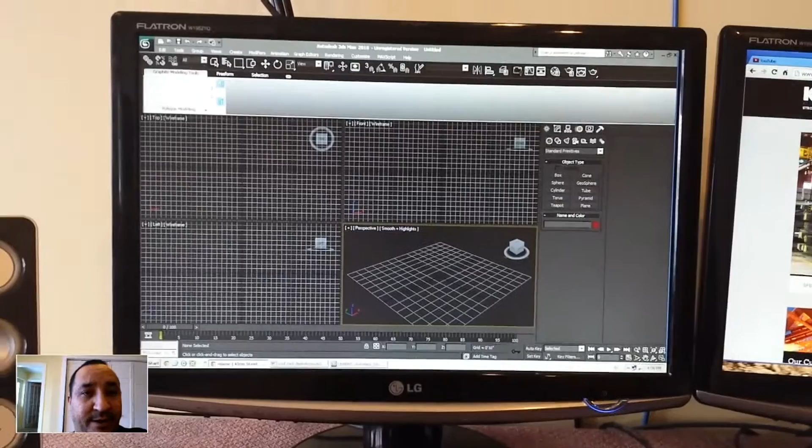Here's the program I'm using. Sorry about the shakiness, I'm holding it with my hand while trying to show you guys this. It's a program called 3ds Max, a real good program. This is the 2010 version.

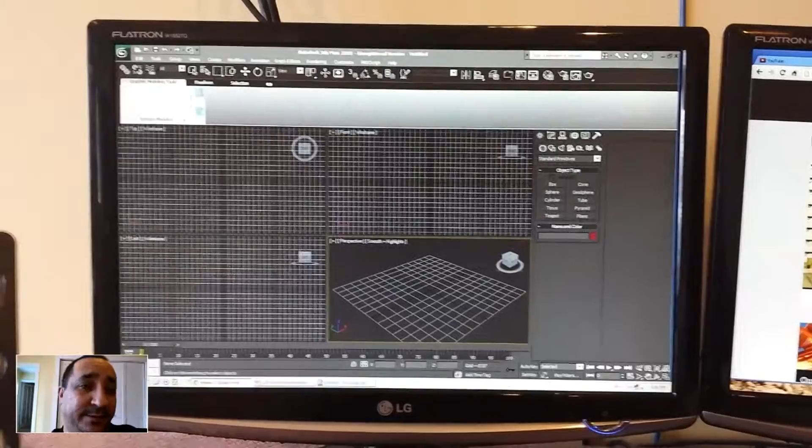I'm not going to begin to show you guys how to use this program. I'm not an expert at it by any stretch of the imagination. I can get some basic stuff done, and that's pretty much it. Some people may not think it's basic, but it definitely is compared to what this program is capable of doing. I stumble my way around through it, but this is the program I use whenever I feel the need to draw something up in 3D so I can get a really good idea of the way it's going to look.

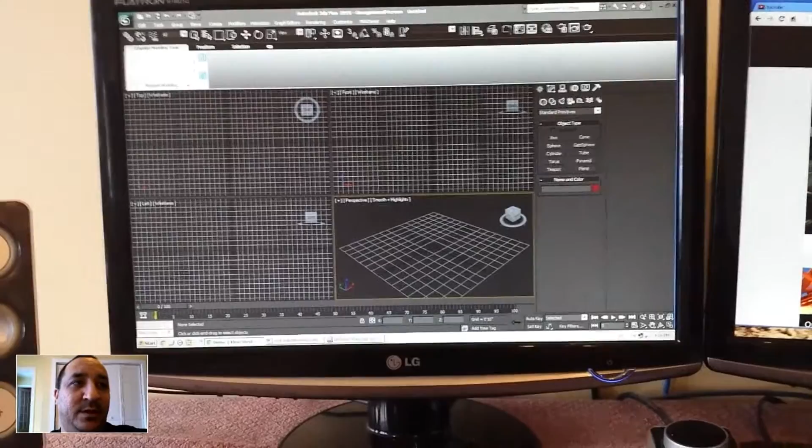With this roof rack, since this is the second one I've done for my truck, I decided to draw this one up so I could really look at it and decide if I like the design or not. So I'm going to be spending a lot of hours in front of this program drawing this up. I'm not going to show you the process, since it's too long, but I'll show you when it's done.

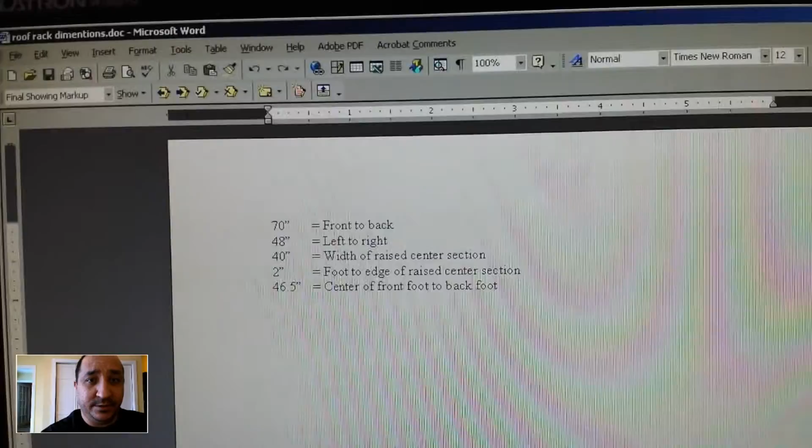Let me come over here to my dimensions. You don't really need to pay attention to any of the dimensions other than the top two. Front to back, 70 inches total. Left to right, 48 inches. The other measurements are stuff you don't have to be concerned with - I do, but you don't.

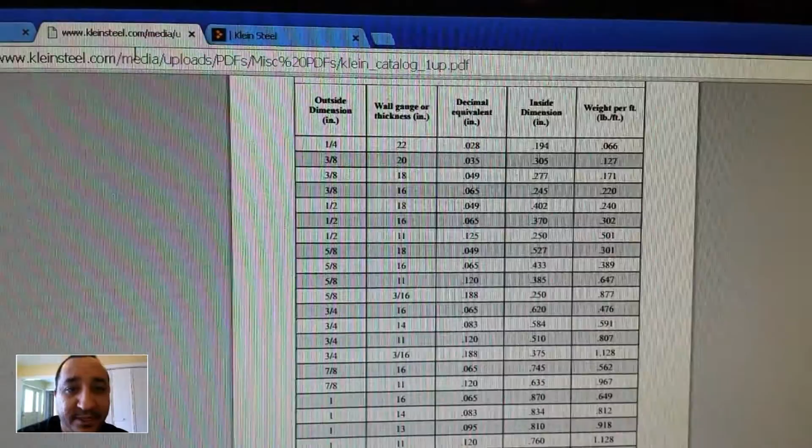Anyway, here's their catalog, I've already got it pulled up to where I need to be. So this is round tubing. Basically what we're looking at is I was trying to decide between 1 inch or 7/8 of an inch. I kind of wanted to go thinner than 16 gauge, but I don't think that's an option anywhere, and that's the thinnest gauge that they have.

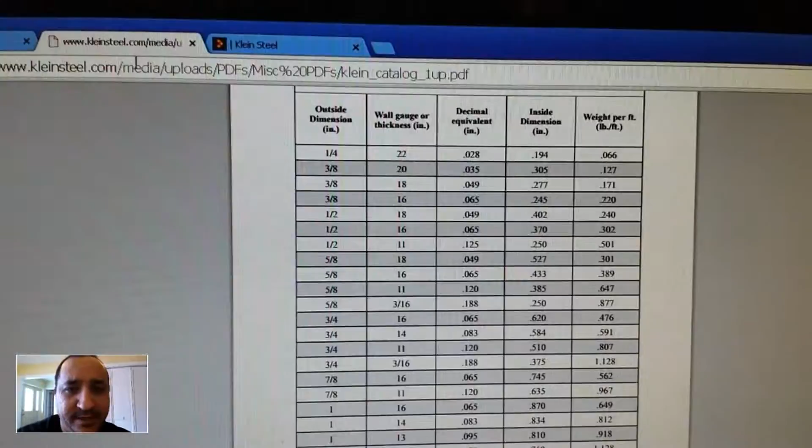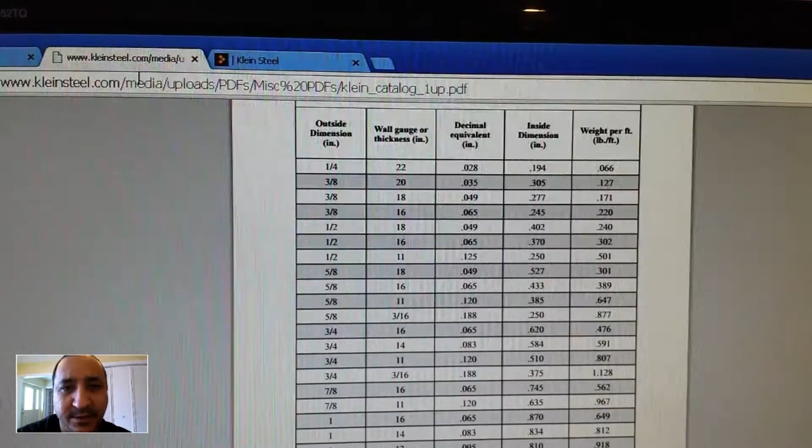So I'm going to go out to the shop right now to take a look at the bender I'm going to use to bend this tubing. I know I have a 1 inch die set, I'm not sure if I have a 7/8 die set, so I'm going to check that out. If I do, I'm probably going to go with 7/8 just because it'll be cheaper, lighter, and should be more than sufficient.

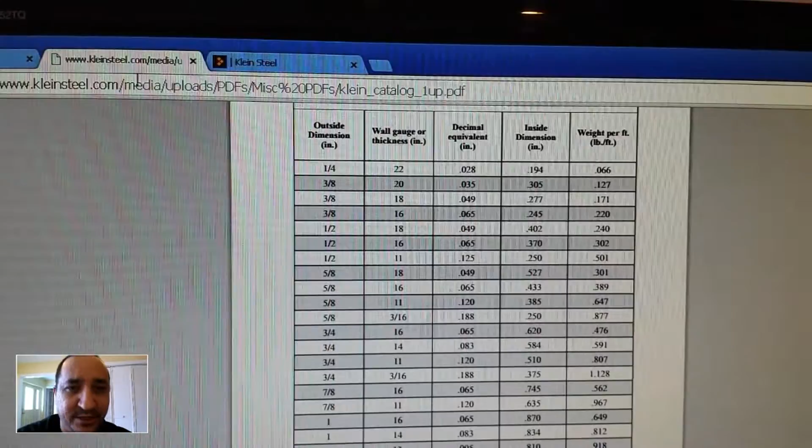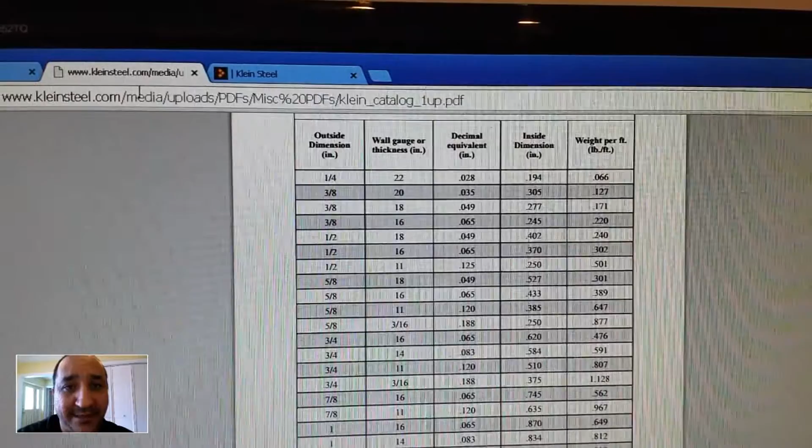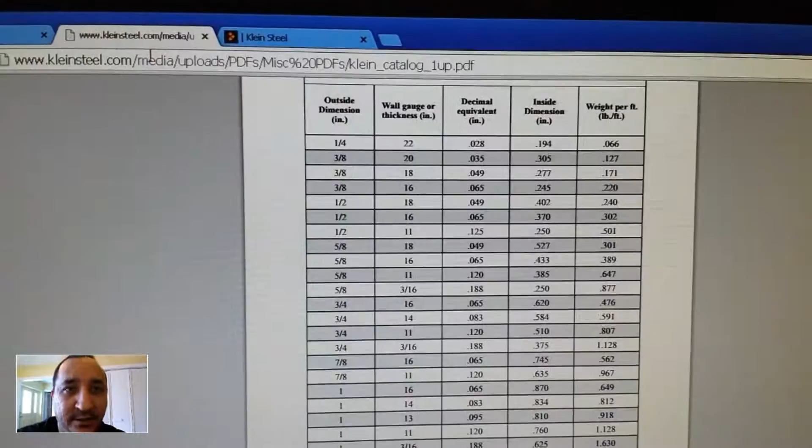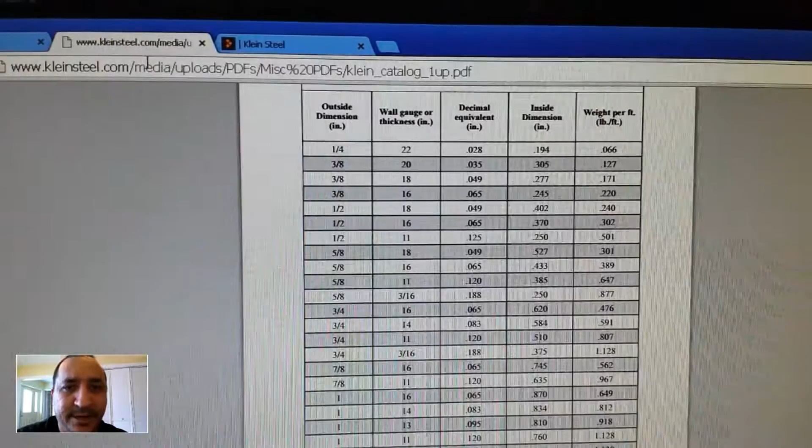The roof rack that I originally had on there was 3/4 inch square, 16 gauge, and it was plenty fine. This is not going to be a very tall roof rack - it's going to be a total of 4 inches from the bottom of the frame to the top, so the actual basket that stuff sits inside will be even shallower. I wanted to make it shallow because the original roof rack was taller than 4 inches, especially towards the front since I had lights in it, and I definitely felt the difference on the interstate as far as drag's concerned. So I decided to keep this a little low profile since I'm going to be putting an LED bar on the front of it.

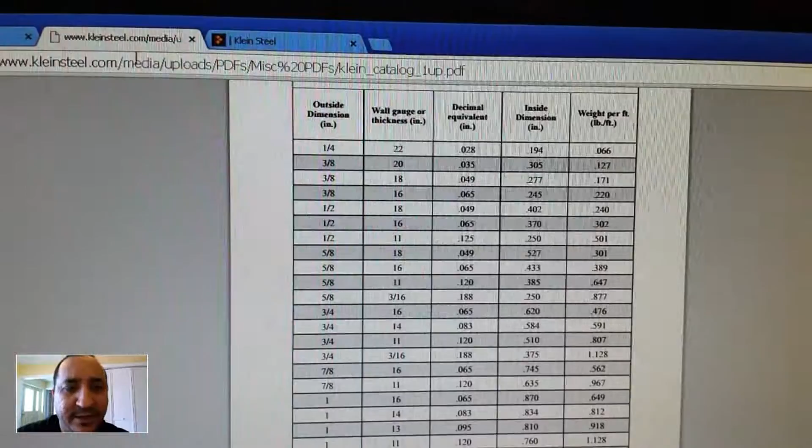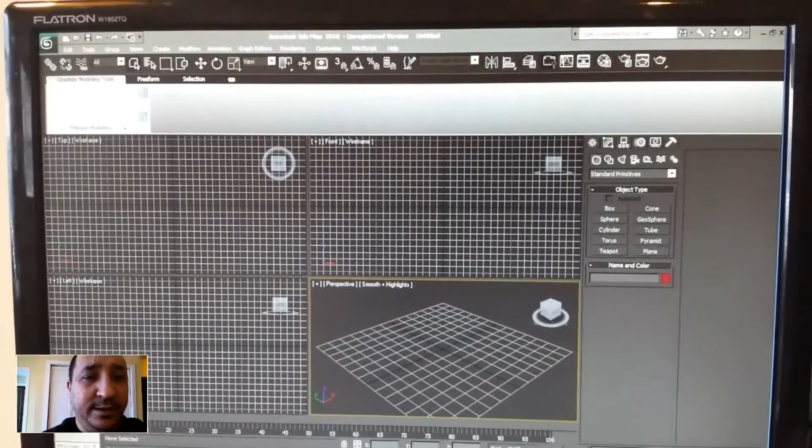So anyway, I'm going to head out to the shop, find out which die sets I have, what size of tubing I'm going to use, and then come back. I'm going to spend a lot of hours in this, and I'm not going to show you guys the entire process because it's a long drawn out thing, hours and hours. I'll show you when it's done, give you a 3D view, and pull this program back up so you can see what I'm working with. Sit tight, I'll be right back.

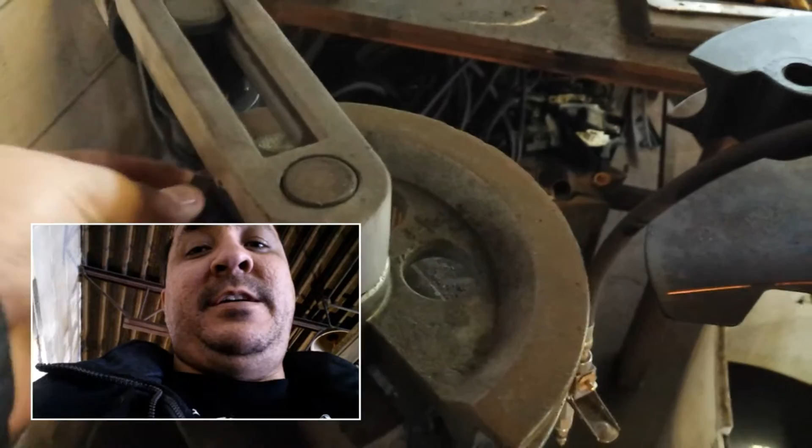Okay, so here's what we're going to use to bend that tubing. This is a bender made by Woodward Fab. It's not the greatest thing in the world. I've only used it so far for square tubing, so this will be the first time I've actually used it for round tube.

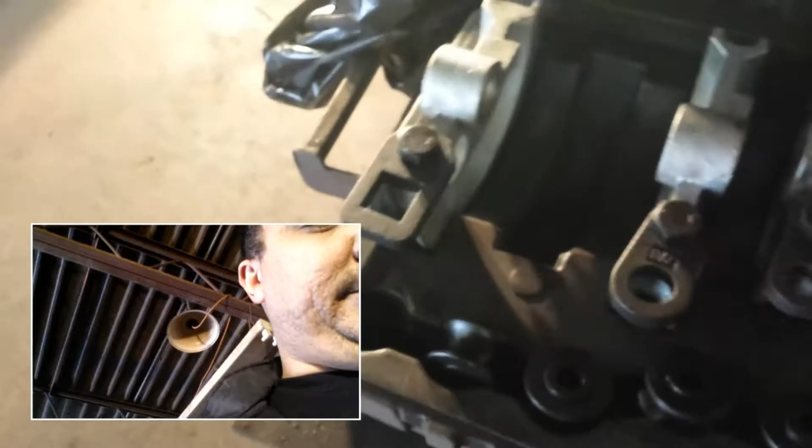Anyway, the square die is on here. I'm going to open up the case and figure out what die sets I have for the round tubing. Here's the case that it comes in, and here's all the different die sets you get. So I do have a 7/8 round tube die - that's actually the biggest round tube I have.

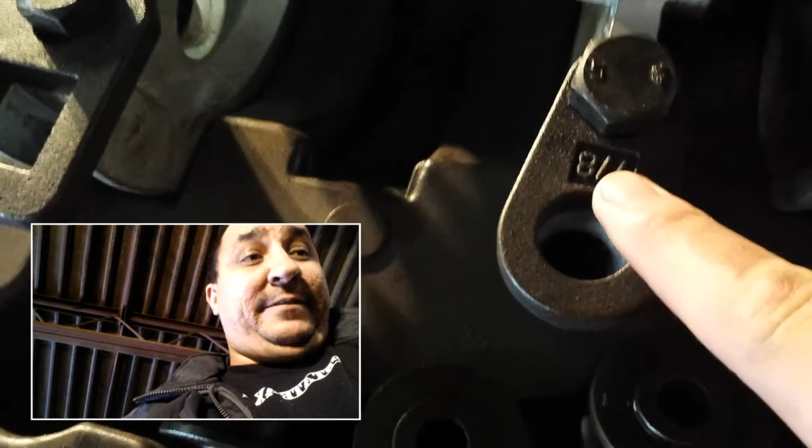So it's a good thing I checked this before I decided to run with a 1-inch die set, because I don't have a 1-inch tube. I'm not talking about my tube, I'm talking about the tube for the roof rack. Anyway, so we're going to run with 7/8.

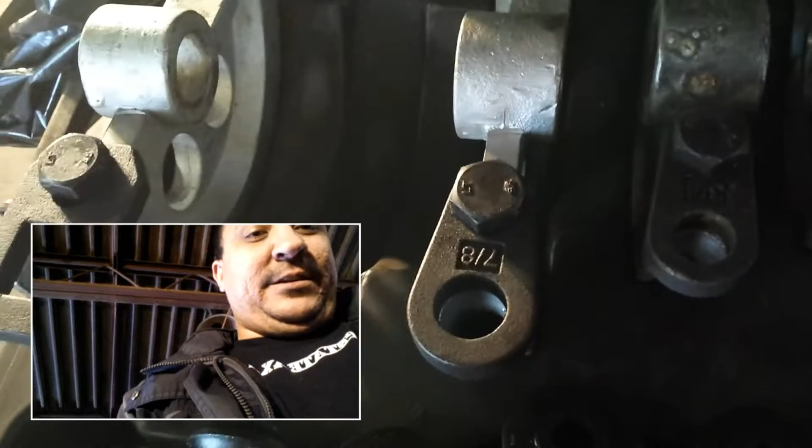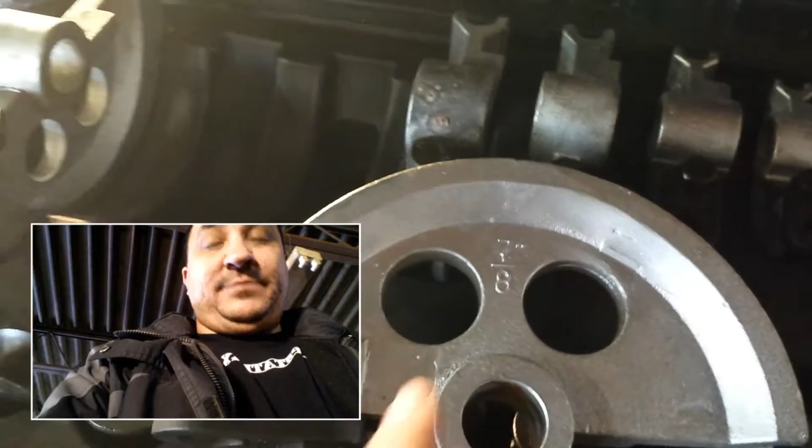That's good to know. I do need to check something really quick - I need to figure out what the radius is on this bend, so I can figure out how many inches it is from here to here, center line. Let me grab my measuring tape real quick, and I will discuss with you the mathematical equation you need to know to figure that out.

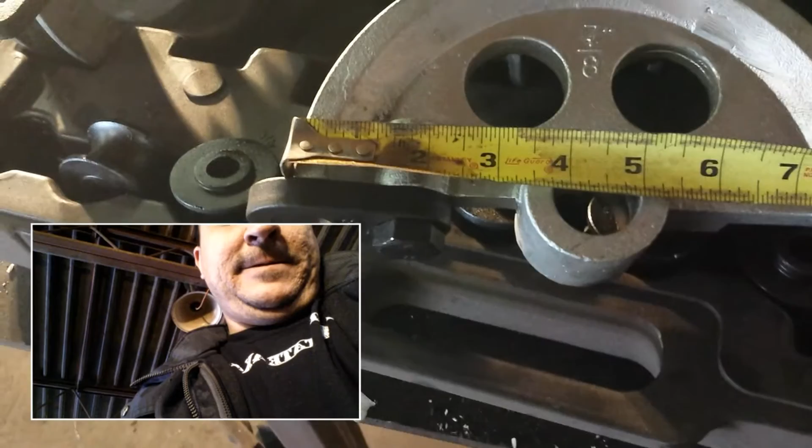But the center line radius on this die set is - we're just going to go ahead and say that's 4 3/8. Yeah, we're going to say that's 4 3/8. That's within a 1/16 of an inch, so that should be fine. So 4 3/8. I'm going to head back inside because it's cold as hell in my shop.

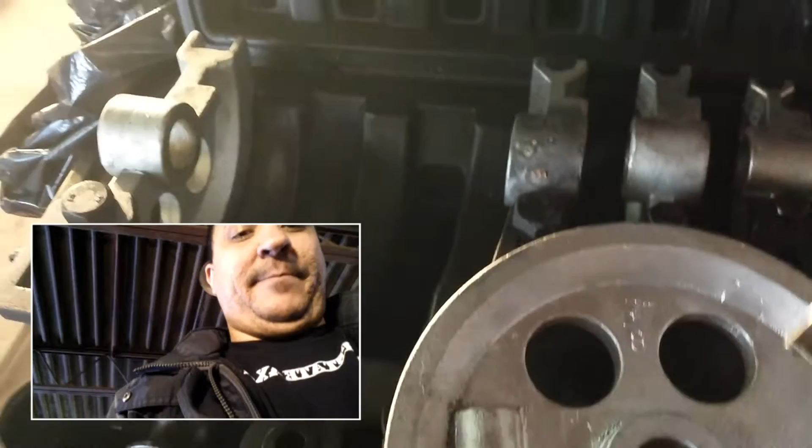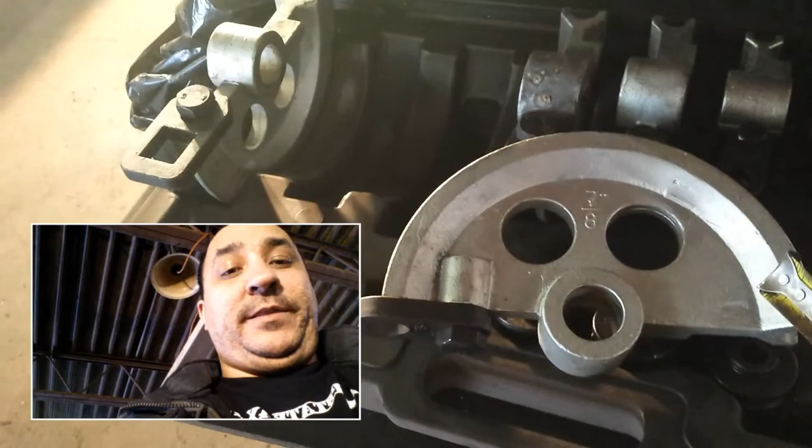I'll show you what the mathematical equation is to figure out what this distance is from here to here. I'm going to need to know that when I bend the tube, and also when I'm drawing this up in the program. I've actually started drawing it, but I needed to run out here because I was getting the corners designed up, so I needed to figure out what that was. I'll be right back, show you guys that in a second.

Hello everyone, back inside the house. We figured out that our center line radius is 4 3/8 of an inch. Now a center line radius means not the inside edge of the tube, not the outside edge of the tube, but from the center of the tube to the center of the bend. Radius is from the center of the circle to the outside edge.

For us to figure out what we need to do, we need to convert that 4 3/8 inch to a decimal point. The 3/8 needs to be converted so we can figure this out mathematically on the calculator. How you convert that fraction to a decimal is pretty simple: top number divided by the bottom number. So in this case, 3 divided by 8 gives us our decimal point - 0.375. So our center line radius for that die set is 4.375 inches.

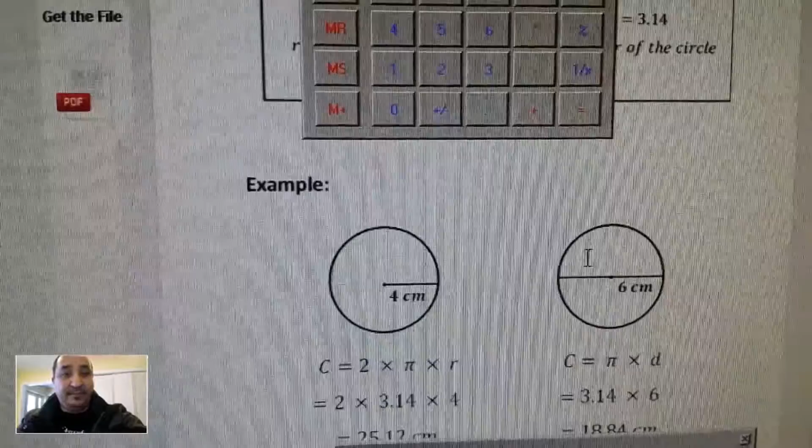Now what we need to do to figure out our circumference is double that so we can get our diameter, which is all the way across the circle. Then we're going to times that by pi, which is 3.14. That'll give us our circumference. Then we're going to have to divide that by 4, because a 90-degree bend is a quarter of the circumference - 90 degrees times 4 equals 360 degrees.

So I'm going to do this a little bit differently just because I can cut some of these steps in half. Essentially what I'm going to do is take this radius, times that by pi, and then divide it in half, and I should get the proper number. So, times 3.14 equals, divided by 2.

Okay, so here's what we got. And I know this is correct because I've done the math on this twice. I did it the long way by figuring out the diameter, then going to the circumference, then splitting it into 4. It's the same number.

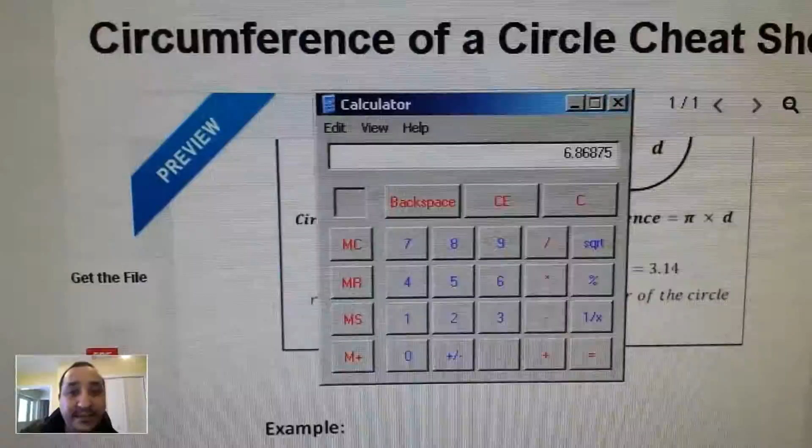So the length of the tube that is going to be required on that die set to make a 90-degree bend is 6 inches, or 6.87, and we're going to round this up to 7. 6.87 inches of tube to make a 90 degree bend.

Stop, let me rewind because I'm getting all tongue-tied. On that die set, we're going to need 6.87 inches of tubing to make the entire 90 degree bend on that particular die set.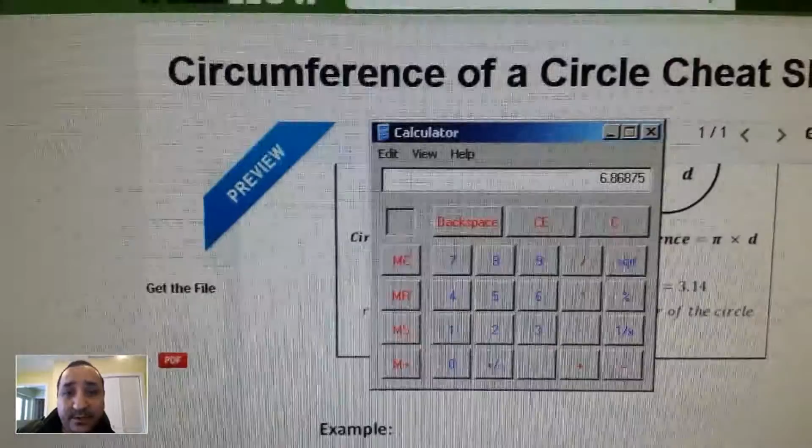So the reason why I needed that number is because over here in 3ds Max, you see that I have my bend here. This is my 90 degree bend. I have to make my bends separate when I'm drawing up this stuff. So I have my bend here, and I need to figure out what the length is.

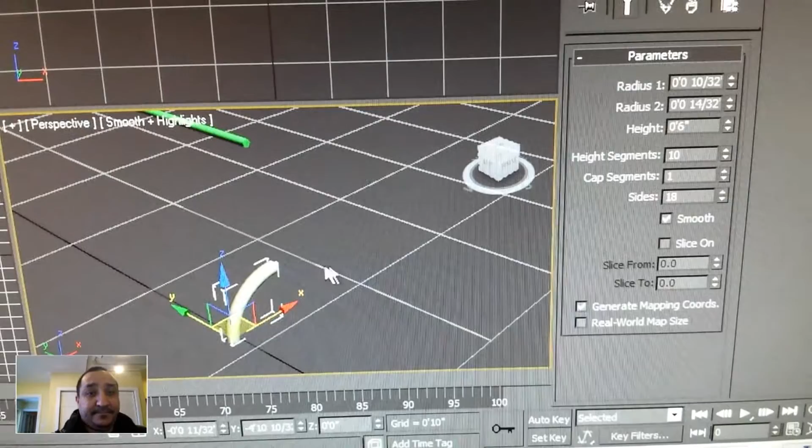So I'm going to click on my piece of tubing, and I already have it set up. I just kind of guessed. So I'm going to come over here to tube, and I'm going to go in here to the height. And my guess was really damn close if you look here.

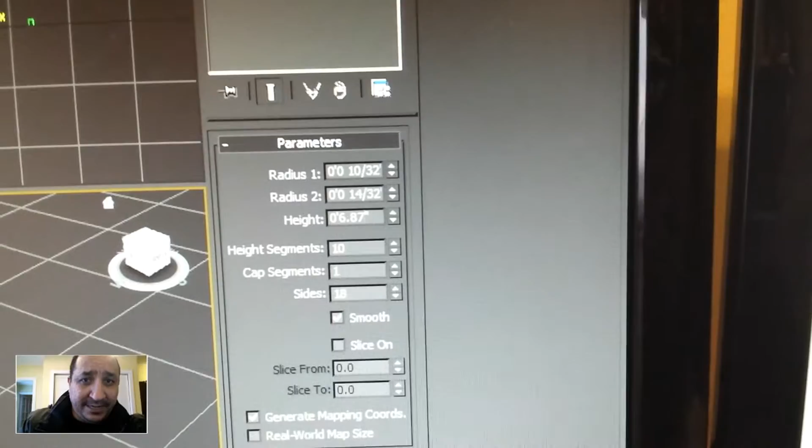It's 6 inches. So I'm just going to add the 0.87 to it, and even though the other dimensions are to the 32nd, this will convert it for me, so I don't have to worry about doing that math. If you want to figure out how to convert decimals back into fractions, go into Google and figure it out.

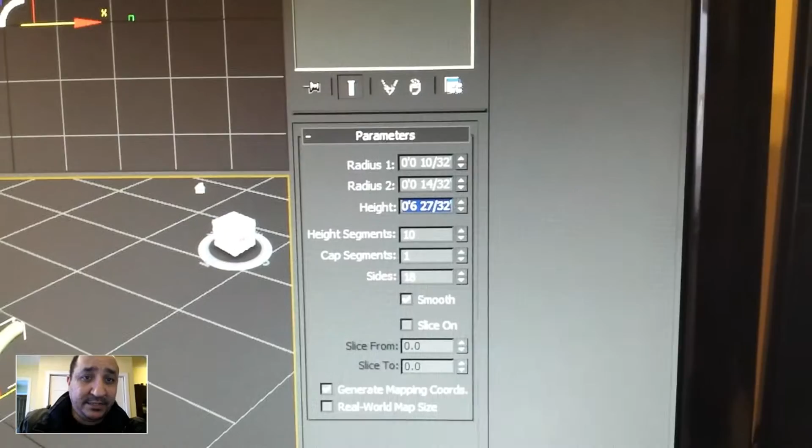When you're dealing with these programs though, 9 times out of 10 you're going to be converting over to decimals and so on and so forth. So I'm going to just hit enter, and it'll convert it into the 32nd. It's actually 27 over 32. So that's the length of tubing I'm going to need to make a 90 degree bend with that bender and that die set.

Okay, so I'll be back. I'm going to continue on with this drawing and we'll go from there. So see you in a second.

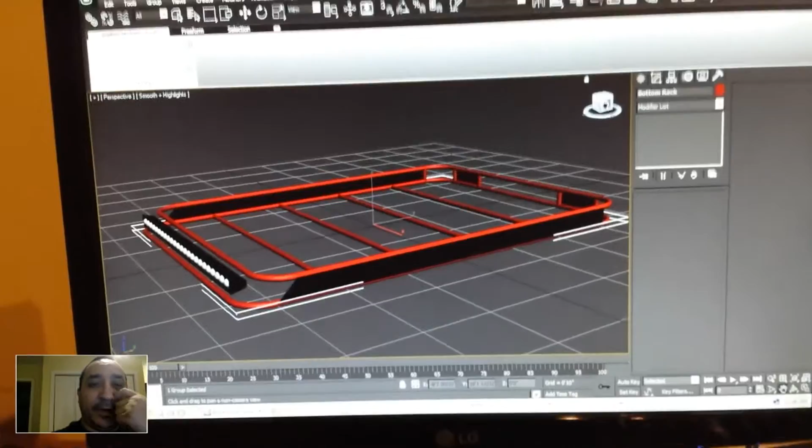Okay everybody, so here's what I got so far. It's not quite finished, obviously. There's no feet on it. If you look right here, there's nothing connecting the LED bar or the front of this rack.

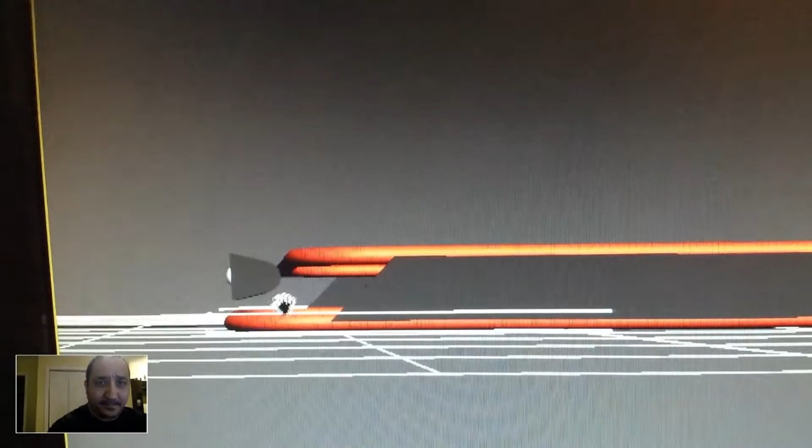What I'm thinking I'm going to do is do some 90 degree bends. It'll swoop down like that in a 90. What that'll allow me to do is have this pocket area here where I can attach to. Still going back and forth with that.

I could always just drop a diagonal brace in here, but I'm not sure that I want to do that. I think the 90s behind the light would be better, because then they would give me a surface to mount on.

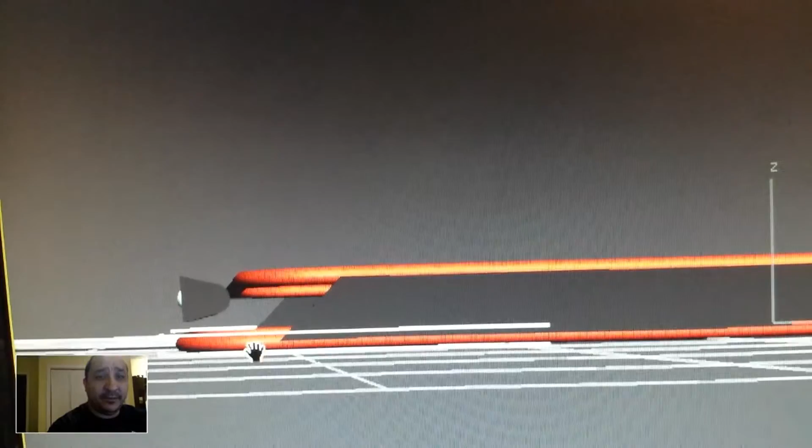Right now you see it being black and red. It looks kind of orange on my camera, but it's black and red. I seriously doubt it's going to be like that. It'll probably just be all black.

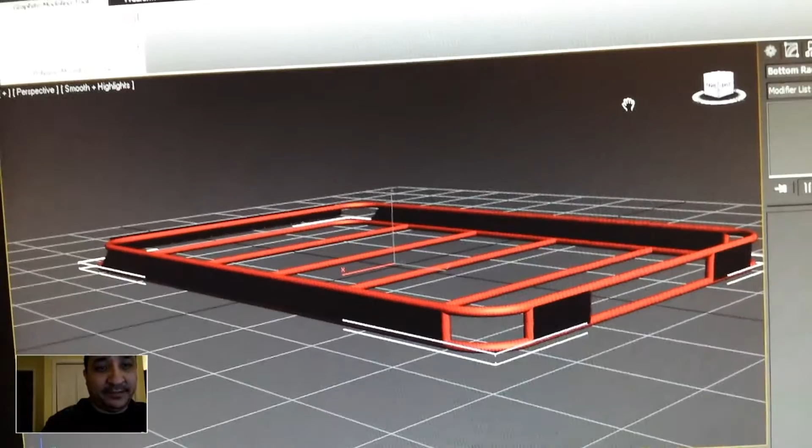The only way I could really do this would be like an unbelievable amount of painting, and it'd end up being sloppy, or I'd have to make the black panels removable. That's a possibility, but I don't know if I want to deal with that. I'm not even sure if I would like the black and red on my truck.

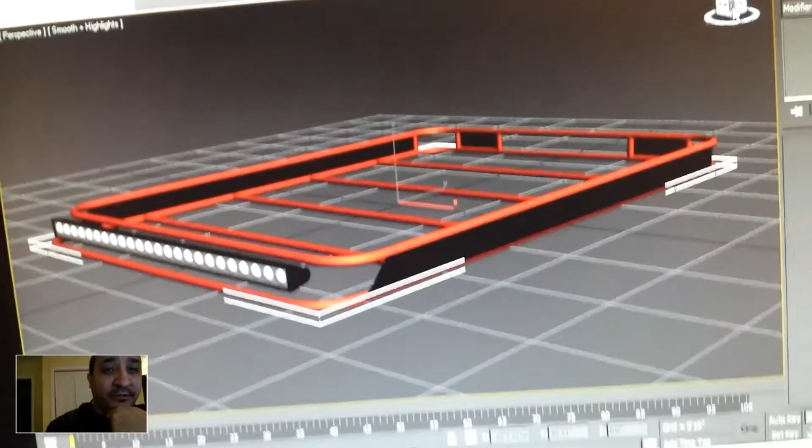My truck is black, red, and white, but I have my taillight guards that are 1 inch round tube, and those are going to be painted black. It'd probably be a good idea to have the roof rack tubing match that, so it'll probably just be all black.

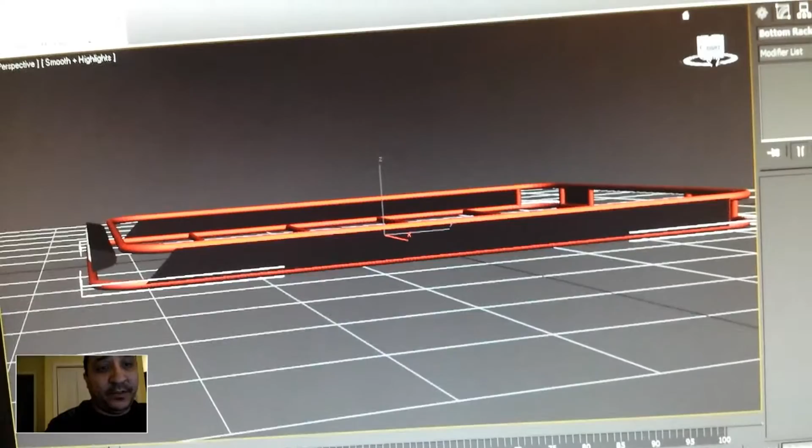If anything, maybe on the side panels I may do something on there. I don't know. One of the things I'm not going to show in this drawing is the side panels will have holes punched in them. I'm not sure if I'm going to go all the way down it or just every so often or something. I've got to have some way to hook tie down straps to it.

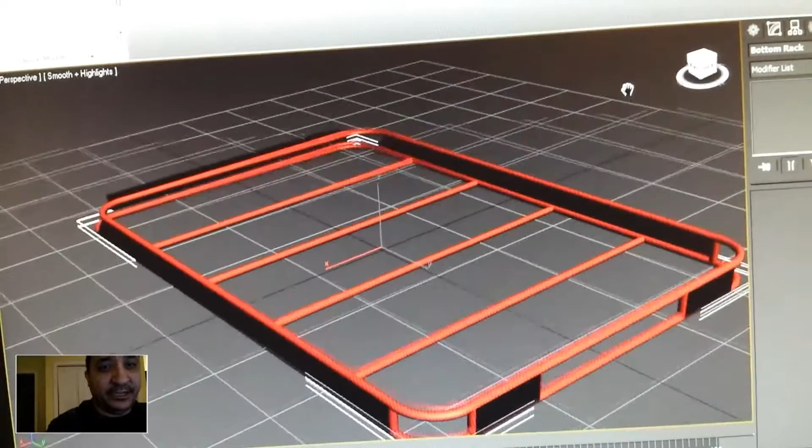One of the other things that's not showing on here just yet is, actually, you know what, now that I'm thinking about it, if I do what I was saying here as far as the 90 degree bends, I'm going to have a little bit of a problem.

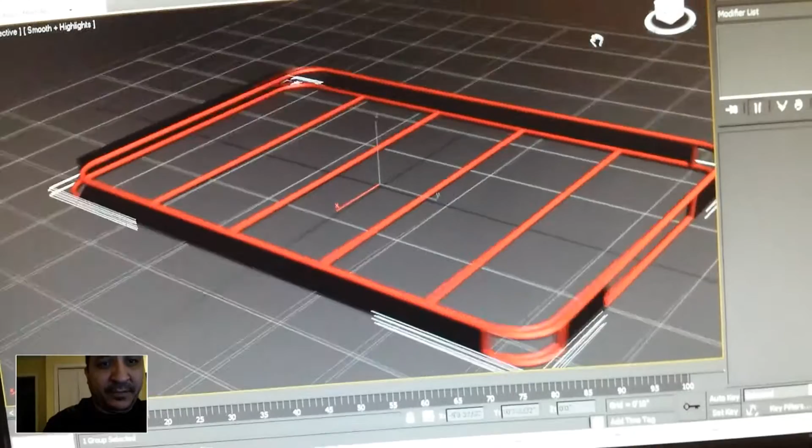And I'll show you why. There's going to be expanded steel on the bottom of this, and if those tubes swoop in at a 90, then I'm not going to have anything really to attach it to on the front, unless I notch the expanded steel around those tubes. That's something I could do, but I'm not so sure I want to, so I'll have to think about that.

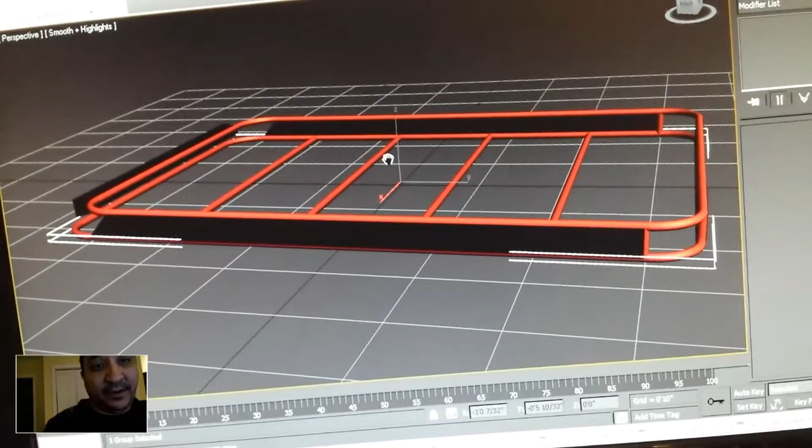I may end up having to put another brace right here and just stop the expanded steel right there, because if you look, you know, I could just drop the brace in right here, which would line up with the top here, and then stop the expanded steel here, and then still bring in my 90-degree tubes there. I don't know, I'll have to think about that a little bit.

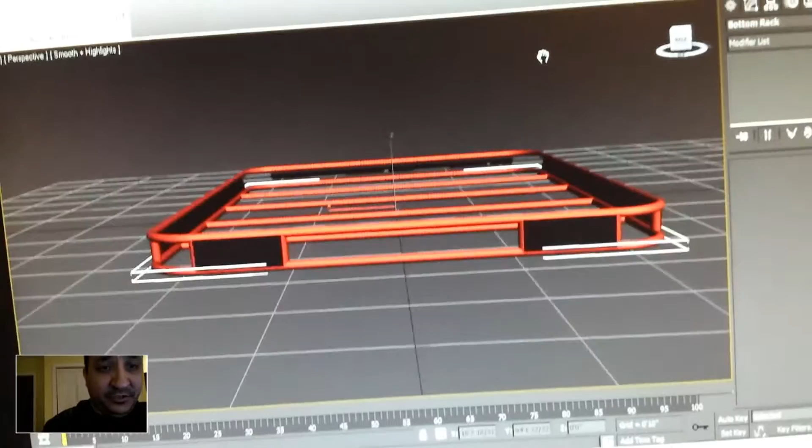These two rear sections here, I didn't want to do a full panel all the way across the back to avoid drag, but these two back little panels here, the reason why I put them there is because I would like to put in some recessed lights, or flush mounted lights of some sort.

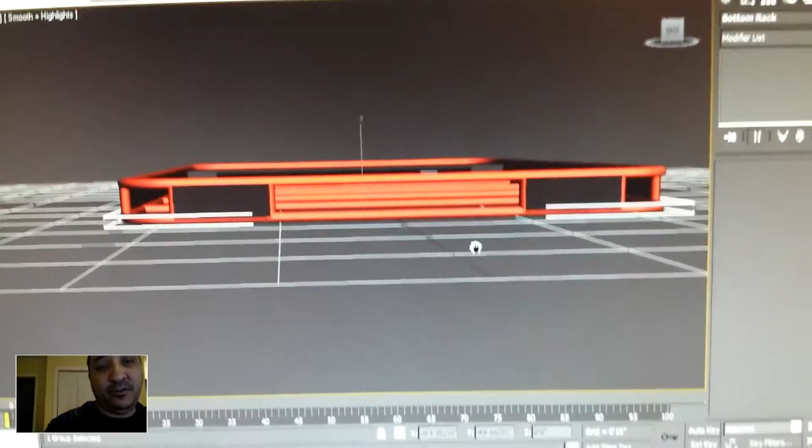Still going back and forth if I just want those to be backup lights, you know, just clear basically. Something where I can put on a switch, flip them on, get my rear facing lights going so that I got more light back there. Backing up on the trails at night, it's always nice to have as much light back there as possible.

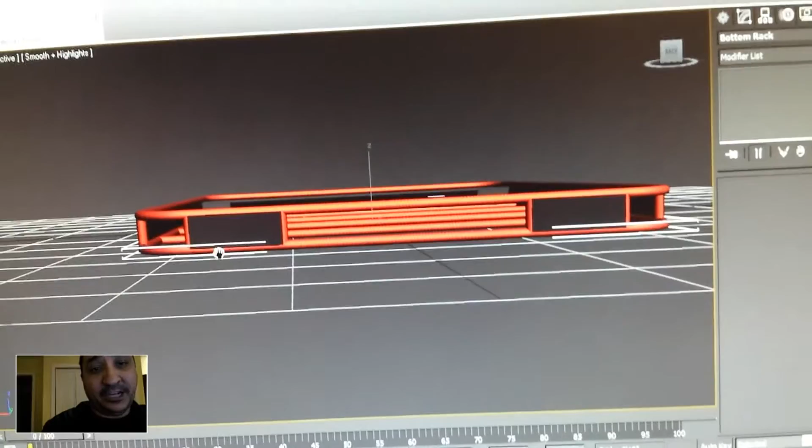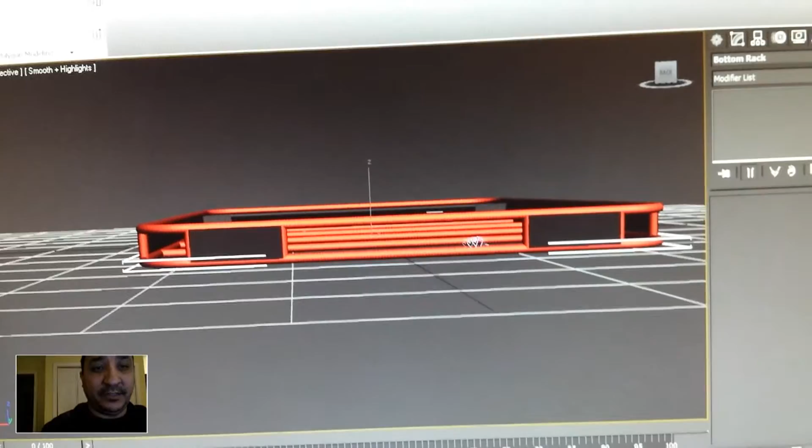But my rear hatch lifts up when I'm accessing the back area of my truck, and it would be completely in the way of this, so I can't really put an LED bar back here without having the roof rack being much shorter than I want it to be. So I figure just some flush mount white LED lights of some sort would be good to inset in here and kind of keep that paneled look going on without it causing a tremendous amount of drag.

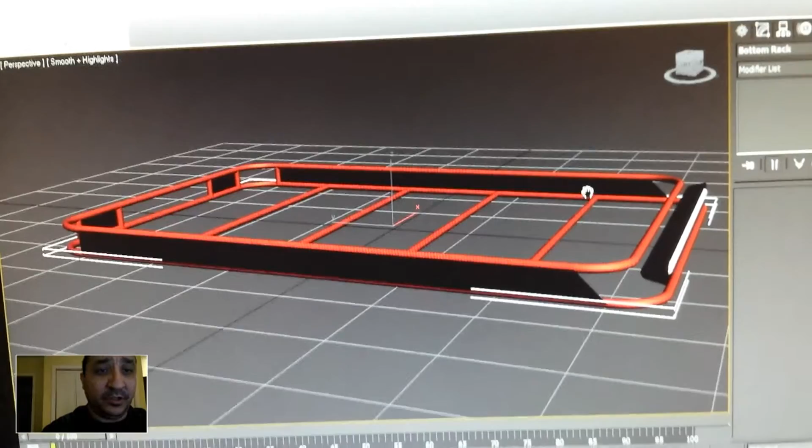You see the vertical tubes here? I'm going to drop at least 2 more somewhere along here, maybe 3 more, probably just 2 more, and then I'll have the ones in the very front. These side panels are going to be welded, so I really don't even need 2 more.

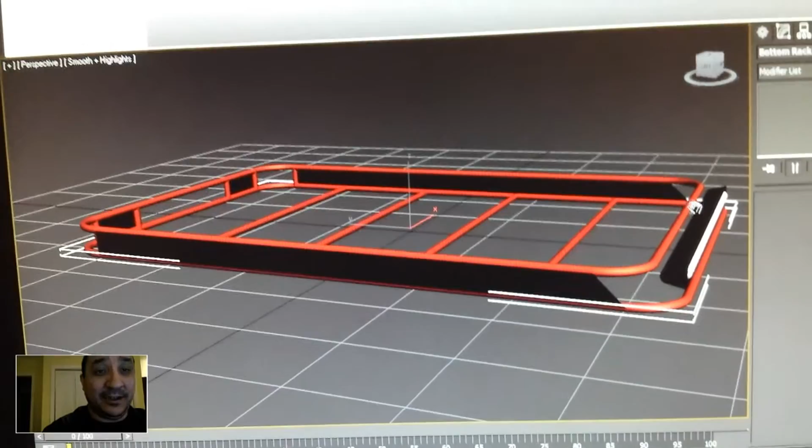I mean, I could just put 1 here in the front of it, probably drop it in at an angle just so it looks consistent, and then just punch the holes in, and these side panels will all be welded, stitch welded along here. So as long as there's holes there, that'll be plenty strong enough. These side panels will be 16 gauge, so pretty stout stuff. I think it's going to turn out pretty nice.

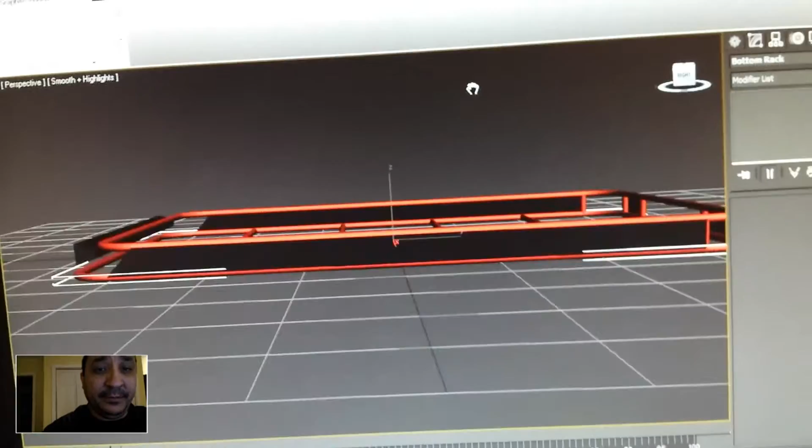Anyway, let me know what you guys think for now. Let me see here, let me get rid of something real quick here. There we go. Let me know what you guys think. I'm going to stop this video for now.

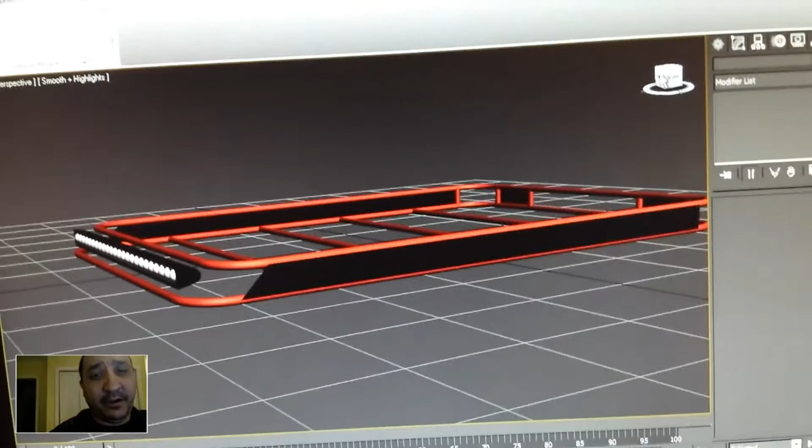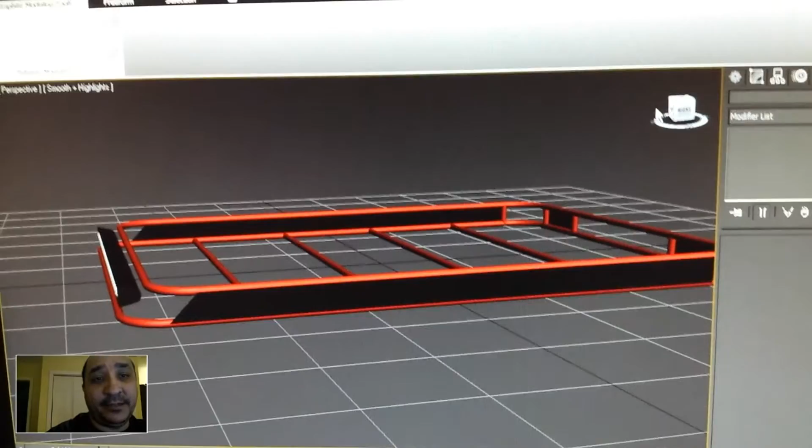Part 2 of this video will show you the finished final product. As far as the 3D design, I'll have the metal ordered and everything, so now I know what I'm using as far as metal. I'm also in communication right now with the LED manufacturer. That might be something that I start selling here in the near future, so I've got to see how that all works out. But anyways, I don't want to start this until I get the actual LED bar in hand and the steel in hand, so that this way everything is perfect.

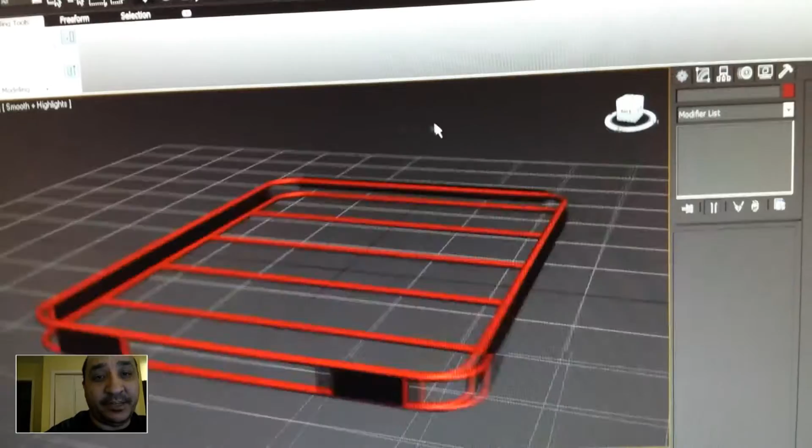The reason why I got rid of my old roof rack is because it was real sloppy. This thing, I want it to be completely production worthy, and it may be something that I decide to do a production unit on, depending on how much time it takes me to assemble it and a few other details.